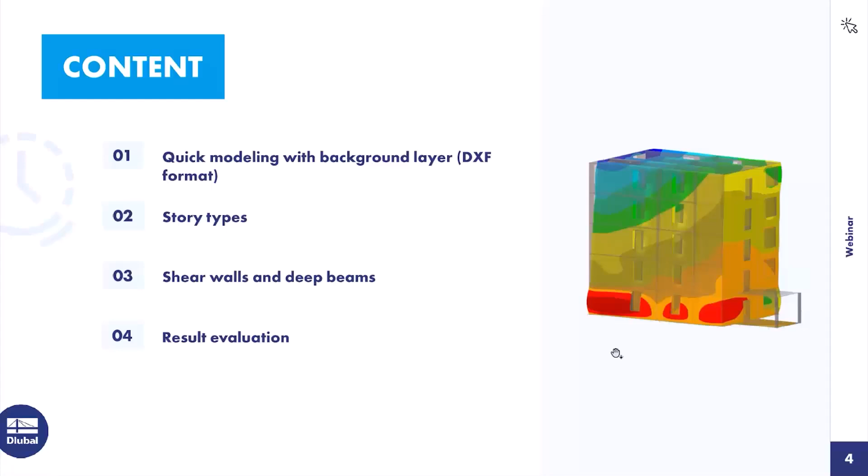Okay, then to our first chapter, quick modeling, here with a background layer for an easier way. I will import a DXF file, and it's a modeling option from bird's view, floor plan, top view - however you want to call it. At this time, we have added this button in the building model add-on.

It's an exclusive button, and you can see the objects you can generate or model in this bird's eye view. So then let's switch to RFEM 6, and I can show you what I mean.

I'll start a new model, let's call it building model. First we must activate the add-ons, of course the building model, and today also the concrete design, so I can show you the configurations and special options which are connected with the building model add-on when the concrete add-on is activated.

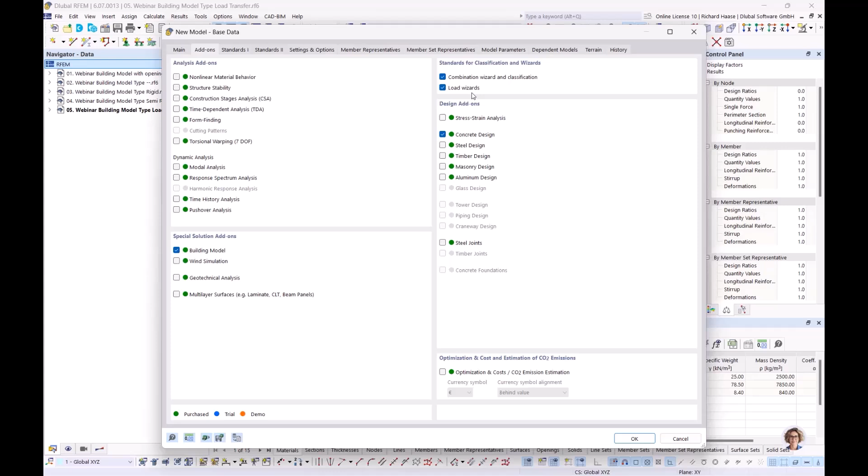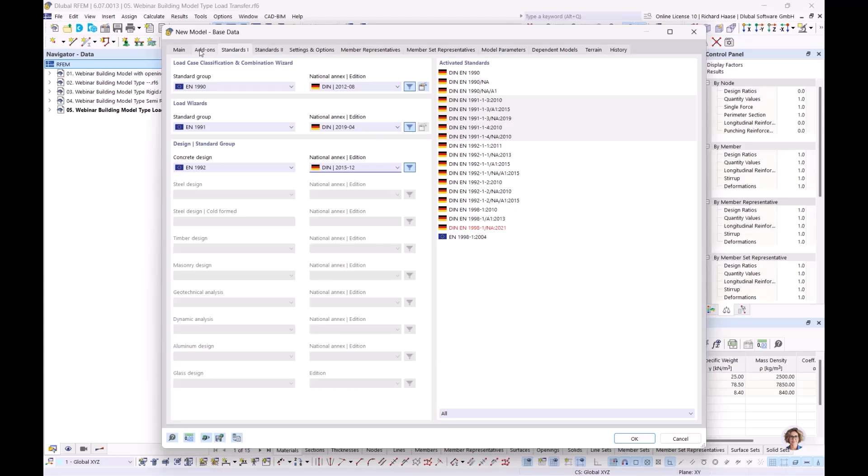And for the quick modeling, I also want to show you our load wizards. For this, today we want to choose the German annex. So when you activate the building model...

Automatically here under settings and options, our surface cells are activated, and this is a nice feature for surfaces which are, let's say, separated by lines or different parts, and you can control and modify the surface cells. But yeah, I will show you.

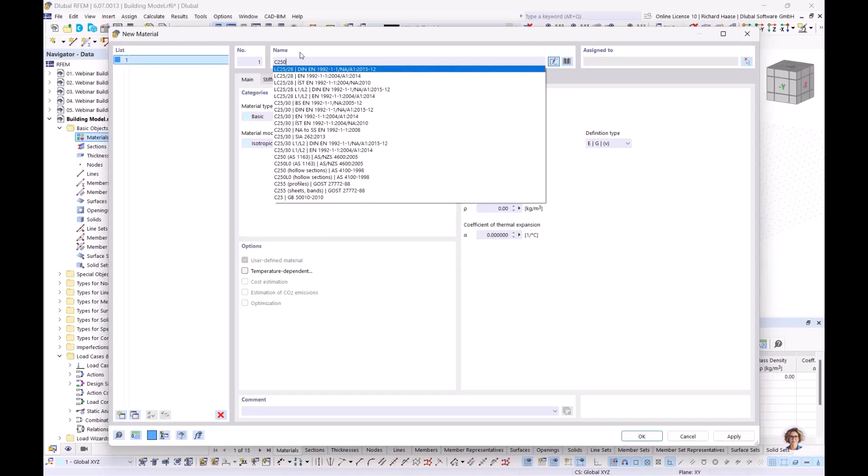So okay, then let's start with the new model. Let's delete all objects so we really have a new model. Let's start with the materials. There I need concrete at first - let's take C25/30. Then we need reinforced steel.

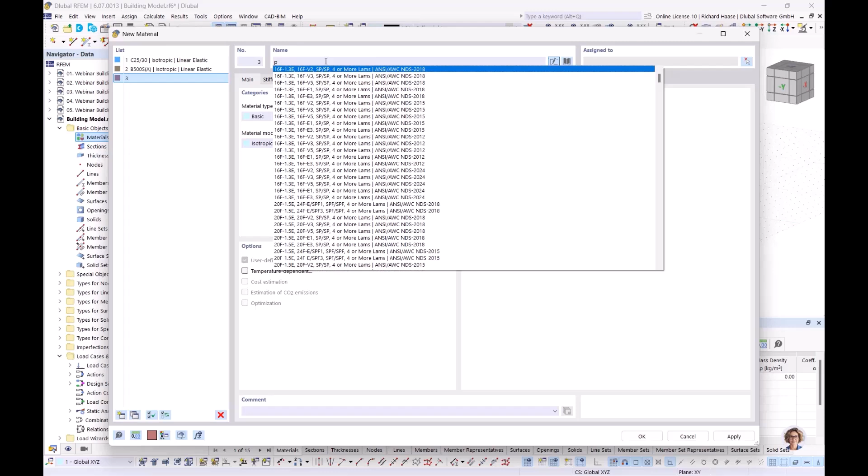Let's take the B500. Okay, and also we need masonry - let's take this one. Okay, then we have defined our materials.

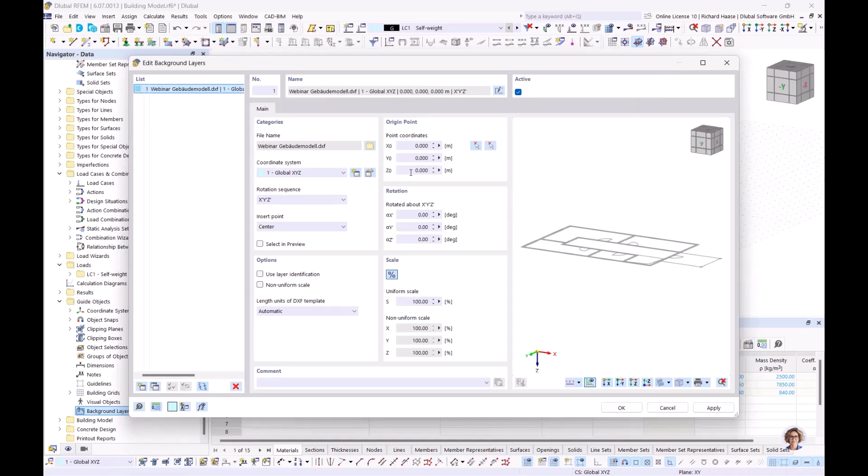Yeah, and okay, then I will upload my DXF file, my background layer, so I can show you what this building is about or how it looks like. Okay, and now we see it's nothing big. It's a simple model, but yeah, for this case it's good.

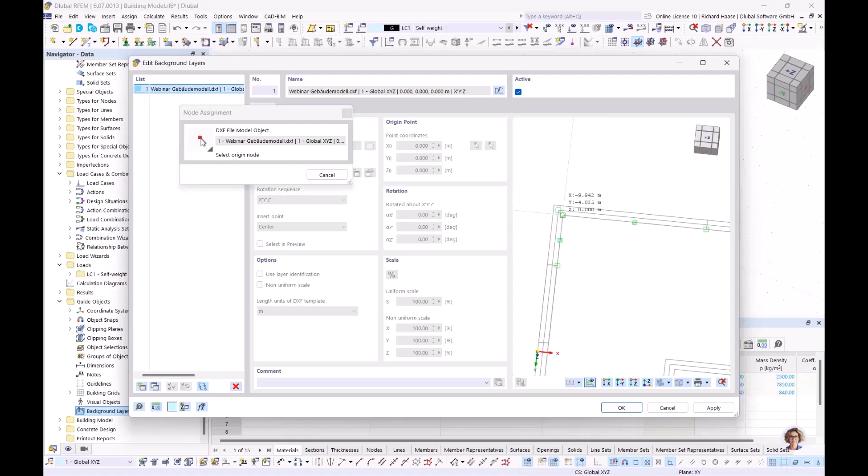Then let's change to meters. And when you add some background layers, you have here two selecting points. The first you can choose - I will set it here to the 0 point - and the second you can choose in your DXF file. I added here some statical system lines. I will choose this line for this.

Now we have our DXF background layer. The walls on the outside should be in masonry, and the inner side walls I will create in concrete. Also this slab cantilever, so not really cantilever, but it's only on the ground floor. And here we have some columns.

Let's go back to our definitions at the beginning. Materials we have defined. Now let's define our section. For the column, it's concrete.

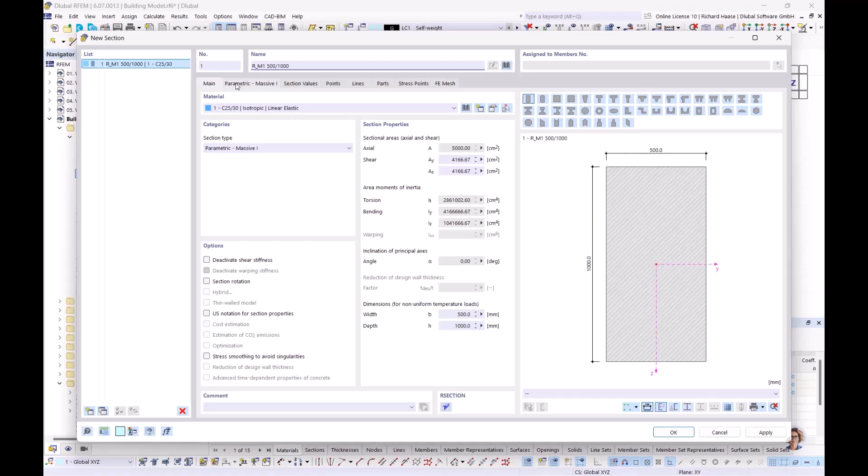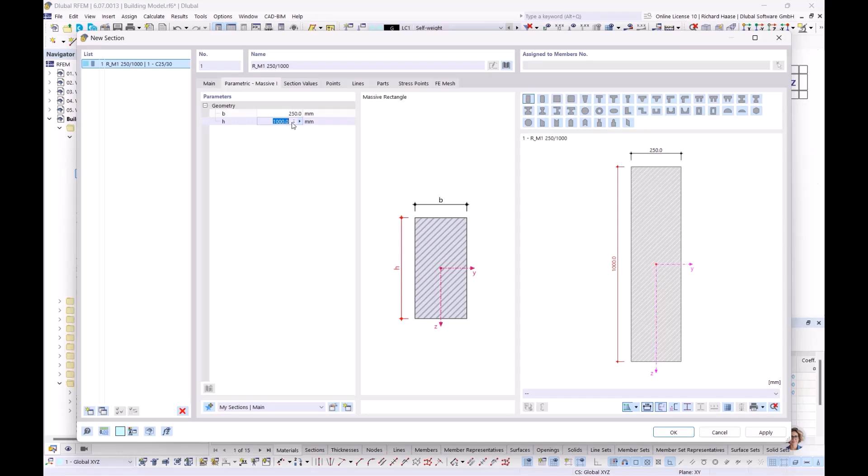Now I will show you a nice feature. When you work with your DXF file, you have the option to measure the properties of the section. So let's take this: 25 centimeters, and also on the other side, also 25. Okay, then let's say okay.

Now we need some thicknesses. Let's start with the masonry walls. And also we have here the same type. Okay, then let's choose this 24.

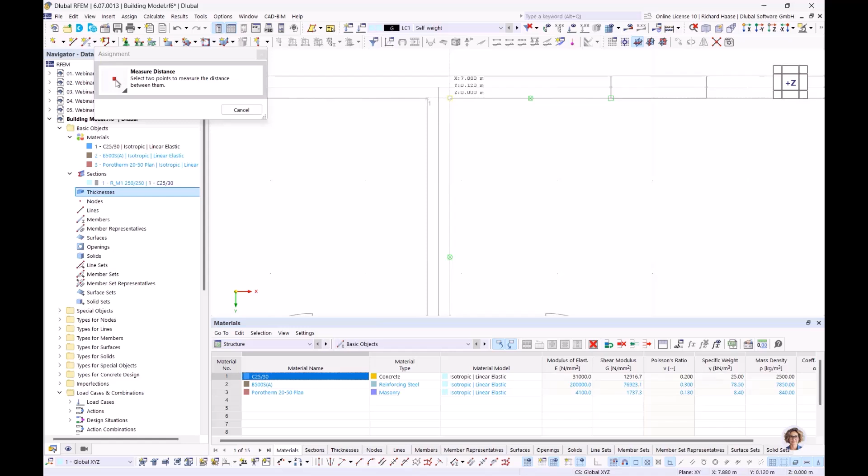For the walls on the inner side with the concrete material, we can do here best way 24. And for the foundation plate, let's say we want to have a thickness of 35 centimeters. Okay, then let's say okay.

So we have defined the materials, the section, the thickness, and now let's go here. Then we must spring to the building model add-on, and we will define now our building stories.

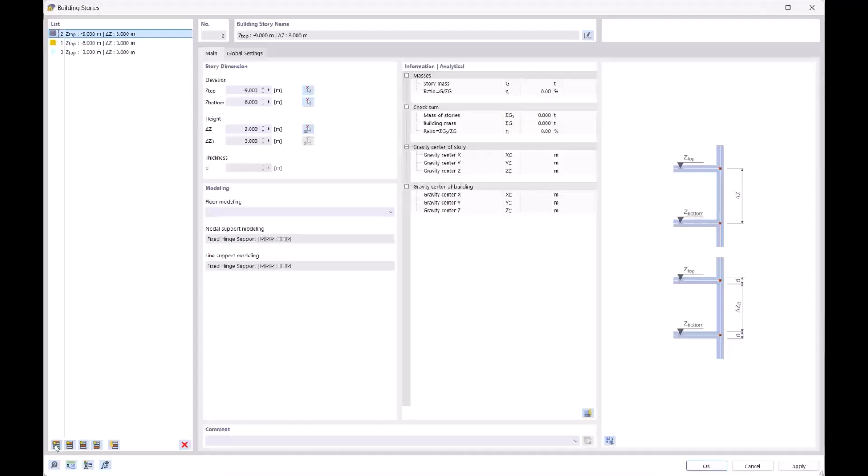I want a new one with a height of 3 meters. And now again 4. You also can model first, but because of this fast modeling, you need to define the stories at first. You can switch here, and now you see story heights here. Here are the floor modeling options, but I will show you at a later point.

So now we have our materials, our sections and thicknesses, and we've defined our stories. Now we can start to define with the fast modeling. So let's start with the walls. Let's take here our masonry material, and now we can...

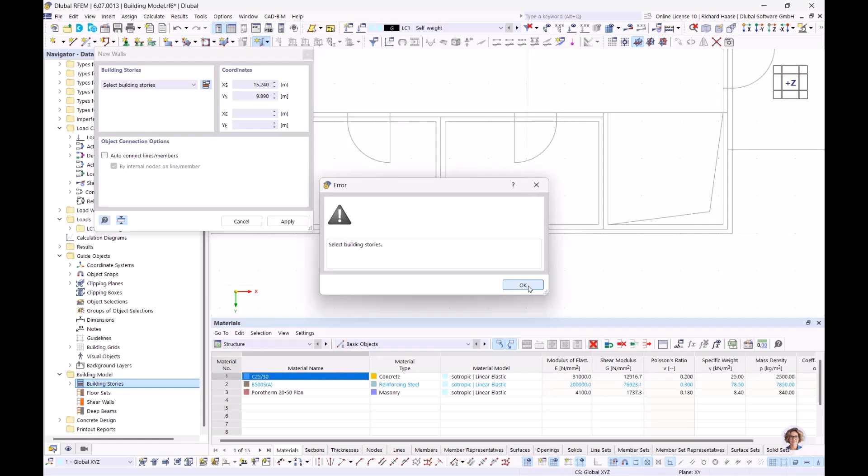Oh right, for this you need to define the stories. So you can choose if you want these walls in this example only on one floor or on different floors, or in our case, we want to have these walls in all stories. Then apply, and let's start.

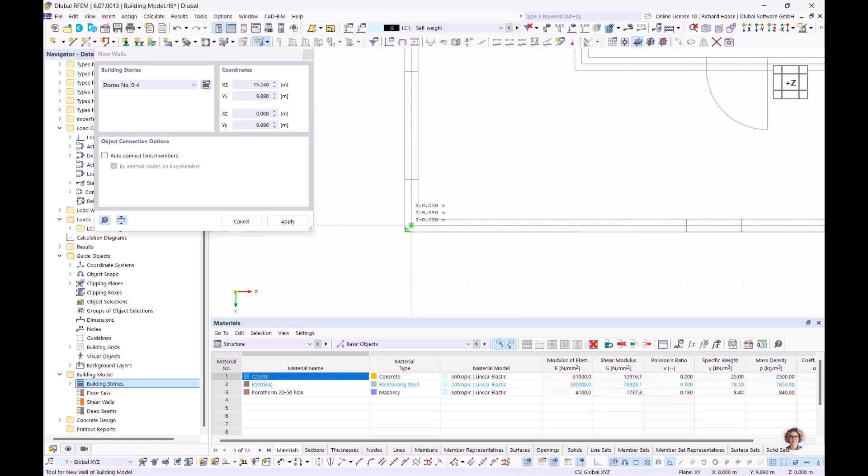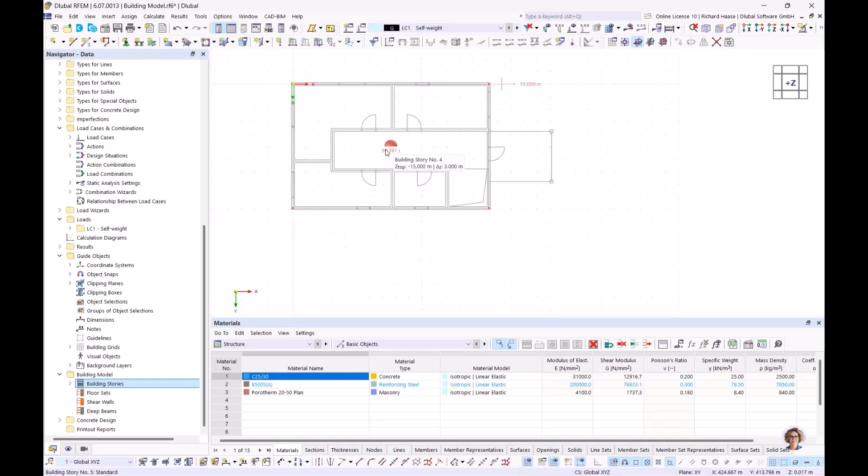So now you see this mass, and it's also because of the building model add-on. The add-on now creates a center of mass, and all these masonry walls are added with their mass, for each story. So you see all outside walls are created, but let's continue with the inside walls.

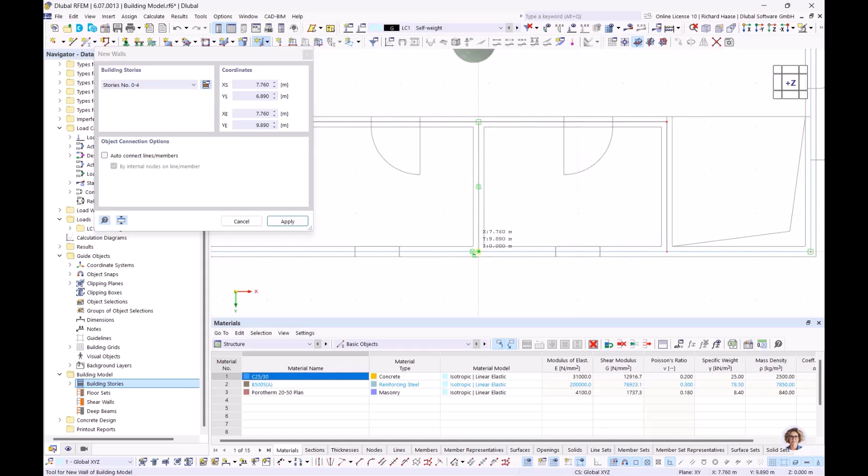24, yeah. Okay, here and here. Here and here. And the last one is here. Okay, let's check if I got all walls. Yeah, it looks good.

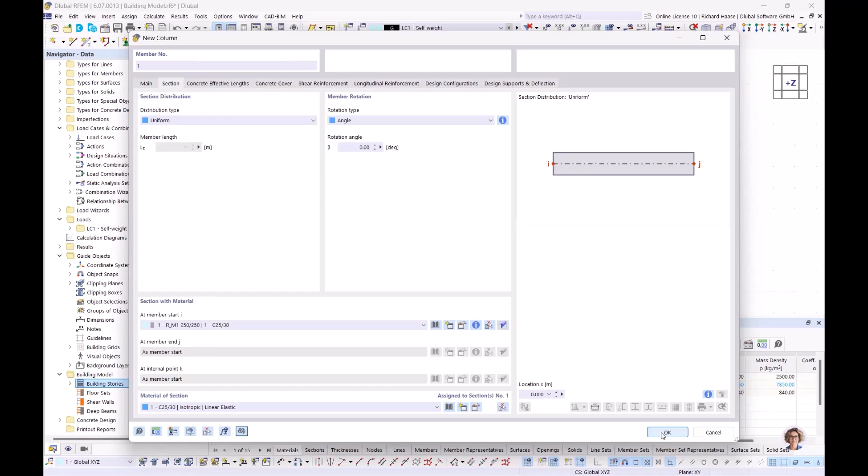Okay, then we want to define our columns with our section we have defined before. And now we don't want it in all stories, only in the ground floor. Say apply, and click here and click there.

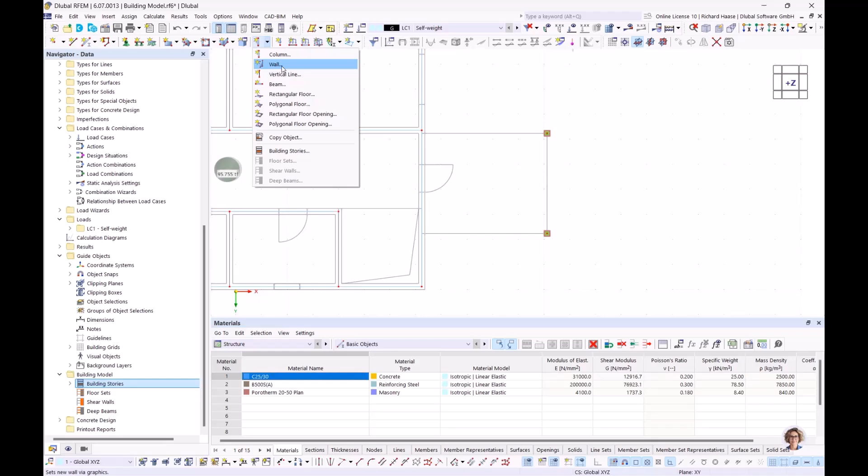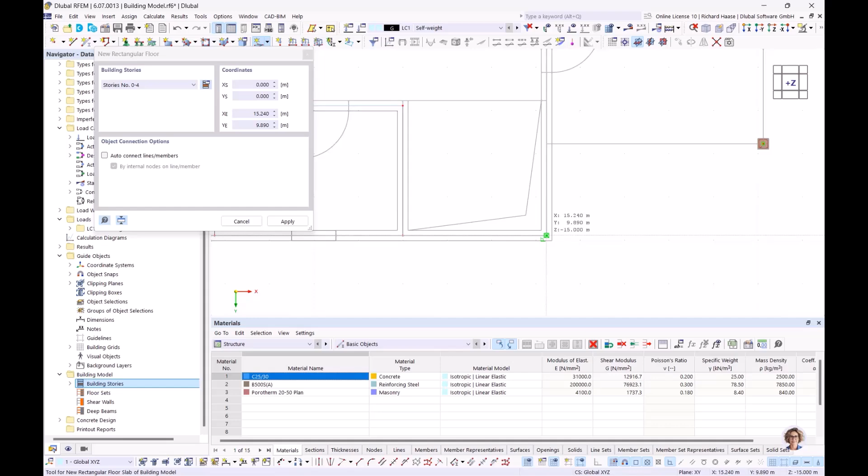Okay, then same procedure for the floors. So 24, okay, and for all stories, apply. Oh, a moment, that's wrong. Okay, again, floor, for all, and apply. Okay, now we have also floors.

Now we need this, I say, cantilever floor. Okay, also 25, and only on the ground floor. Let's start at this point.

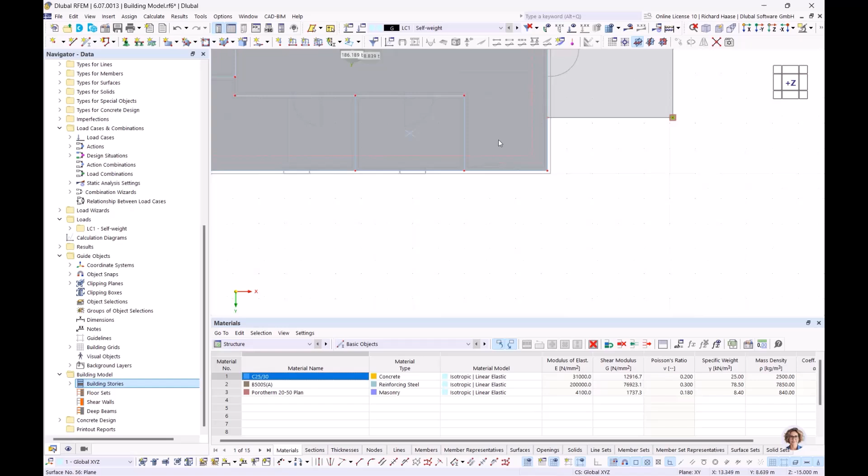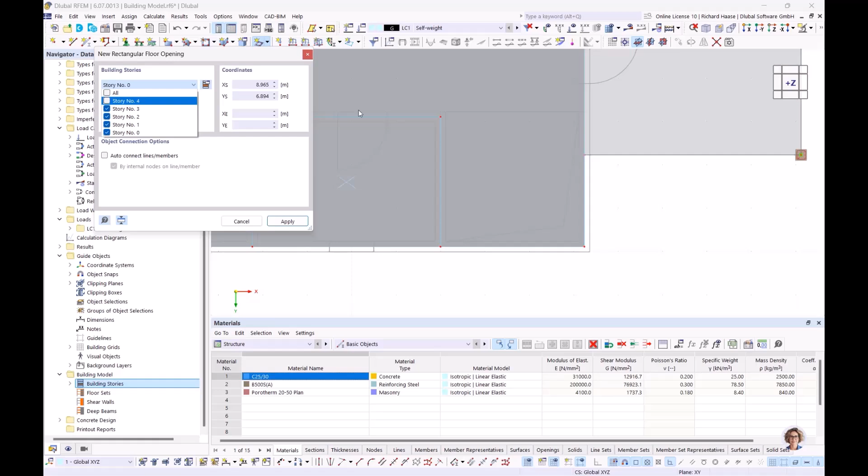And here we have an opening in the floors for stairs. Let's define this floor opening. Here, let's see, not in the last floor. And okay.

So now we have our openings, and you see in a short time we generate a building. The only thing you must generate manually are the openings, the windows and the doors, for example, or other openings in the building.

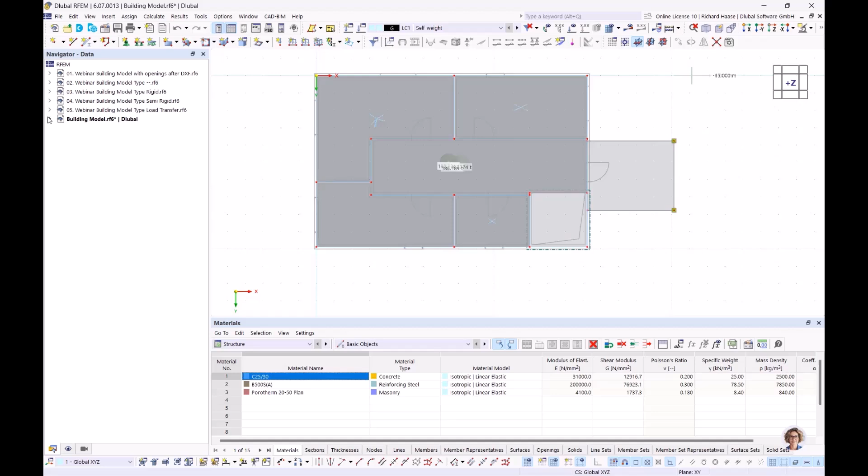And to not waste time, I have modeled this already. Maybe I can switch back to the full model, and there you see the openings. I added also some load transfer surfaces, because imagine when you define wind loads only on the masonry surfaces, these areas for a closed model are missing at the end. So you can define these load transfer surfaces, and these surfaces only transfer the loads to the sides, and don't have a stiffness effect or such thing—only for load transfer.

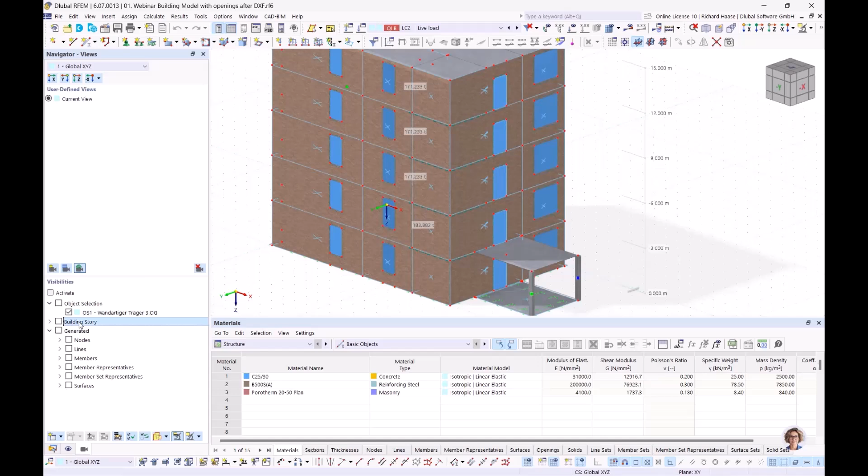Then another nice feature which the building model makes automatically is in the navigator views. There is a point called building story, and when you activate it, you see every story you defined—there's automatically created a view, so you can quickly switch between the stories for loads and such things. I find it a very nice feature.

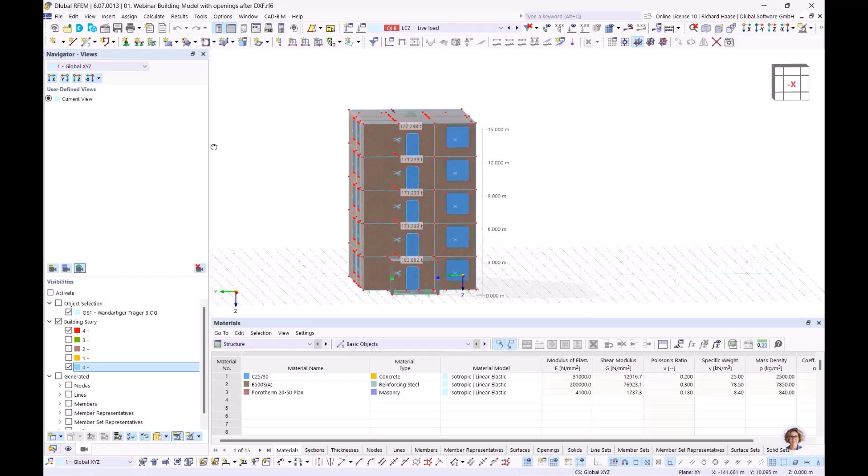Okay, then what I want to show you also—for example here you see it's one big wall, and you see these blue crosses. Oh wait, maybe we change the view. Oh, it's not functioning how I wanted.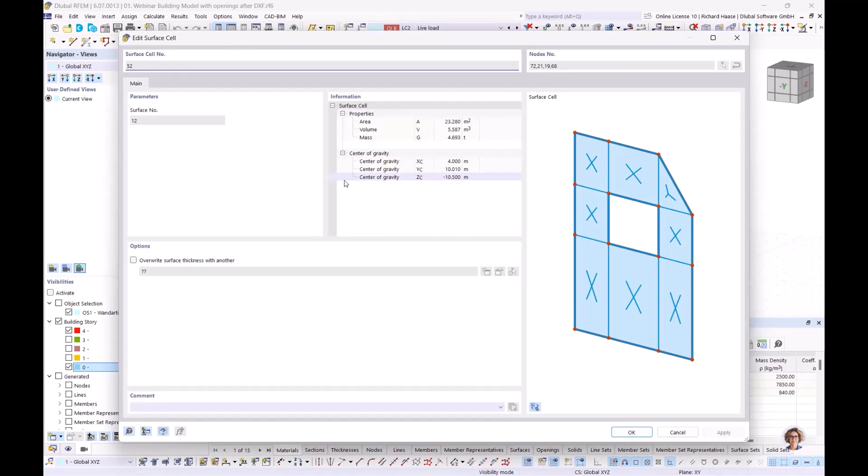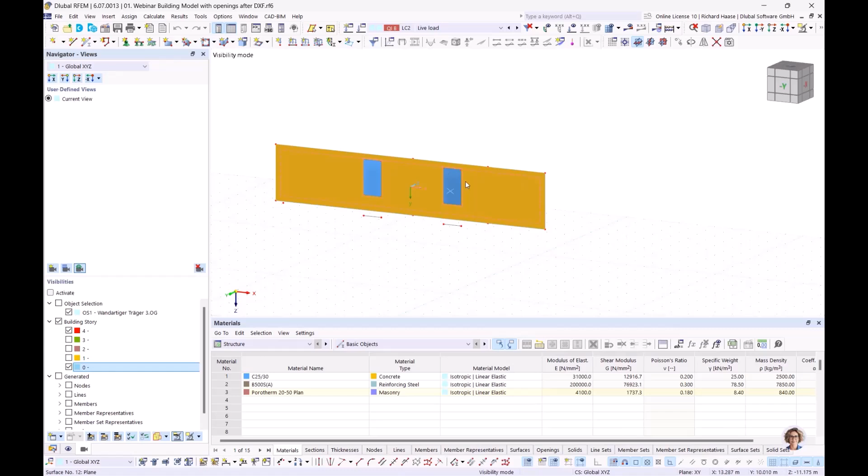You have only one big surface, and with these surface cells you have the option, when you click on the surface cell, to give these cells other thicknesses. With the different thicknesses you can also design the surface as one surface, so it's nearly the same effect as when you use surface sets, but it's a more easy and faster way to define this.

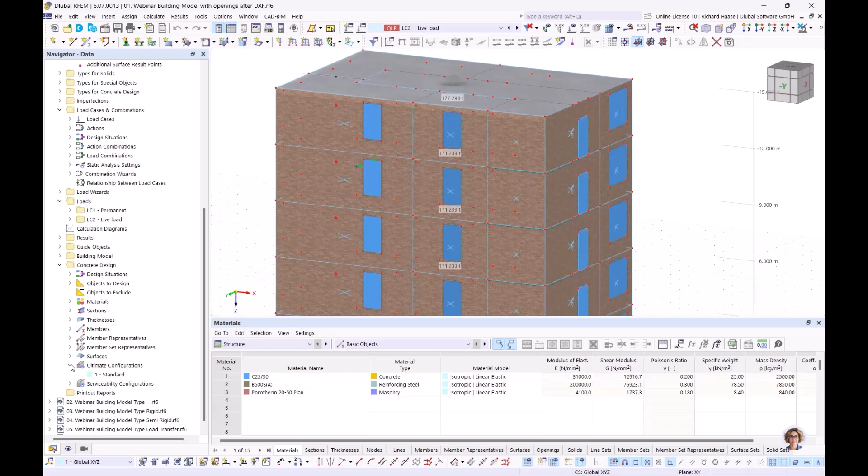Now I want to show you the concrete design. When you activate the building model add-on and also the concrete design, you find in the configurations some additional points which are only possible with these model add-ons. Here are some options for deep beams and for shear walls, so that's now possible.

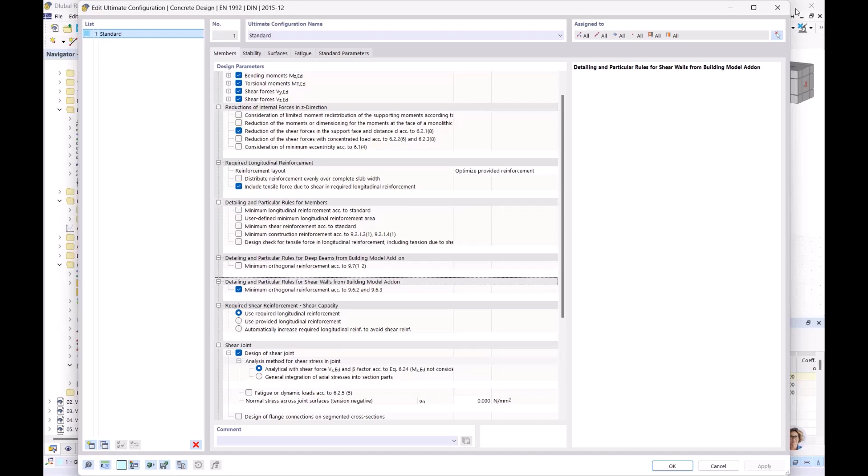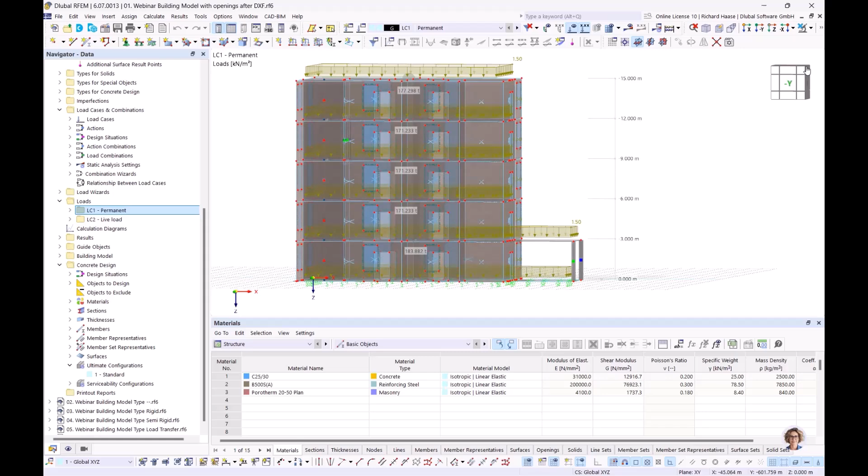Before that, maybe we switch to the loads. Here we have some permanent loads, nothing special, and here some live loads. Now I want to show you the easy way to design wind loads with our load wizard, which we find here.

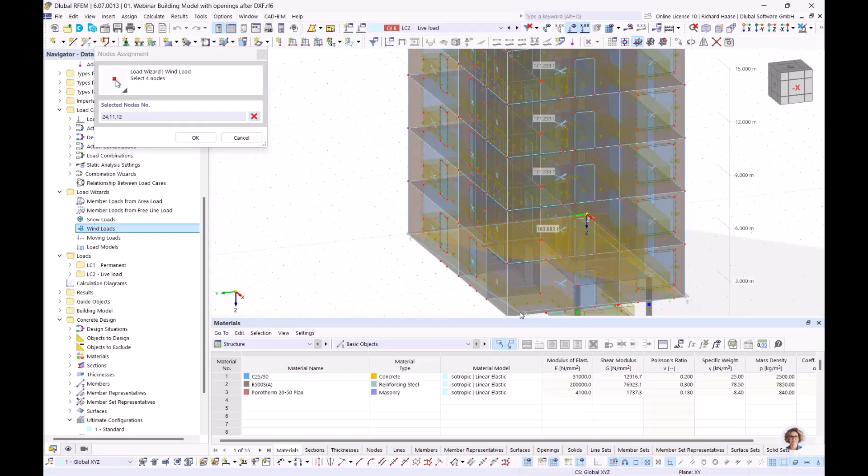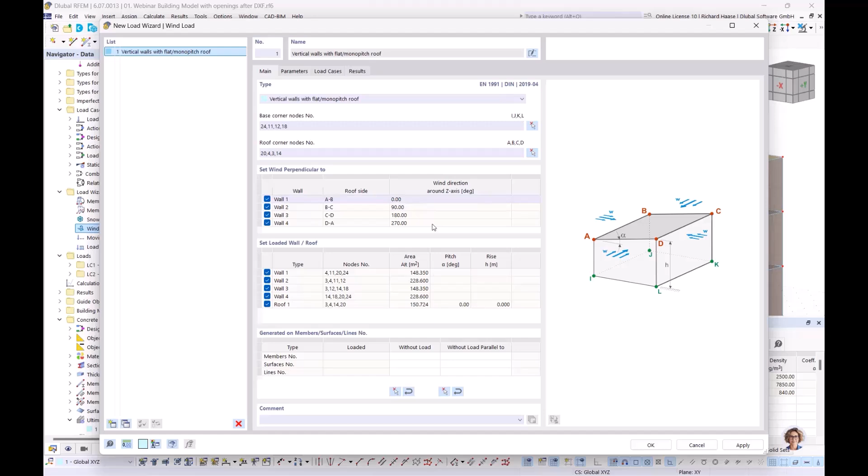For example, here are our wind loads, and so we have a flat roof. Now we want to find the base corners, and also the roof corners. Now you see all walls are automatically detected, RFEM automatically sees the needed walls and roofs.

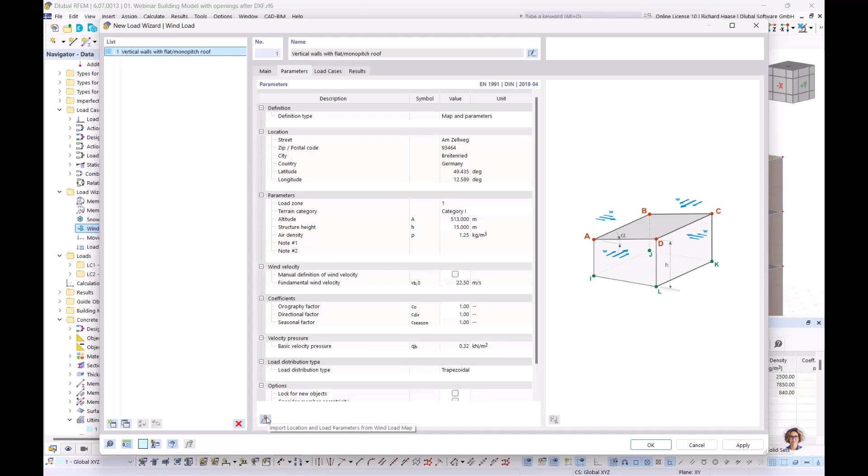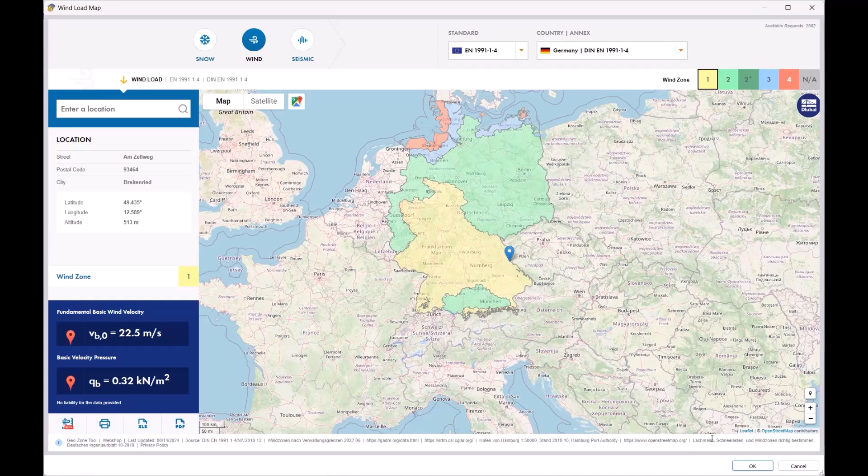Another nice feature is the definition type with map and parameters. That's the way I switch to the German annex, because you need this national annex to define or select on the wind load map. Let's choose the headquarter of Dlubal, here in Tiefenbach, Am Zellweg 2. Why am I not connected? One moment. Okay, now we have it. Let's say okay, and you see the program transfers information from these wind load maps, the terrain category, load zones, and all information for the wind loads.

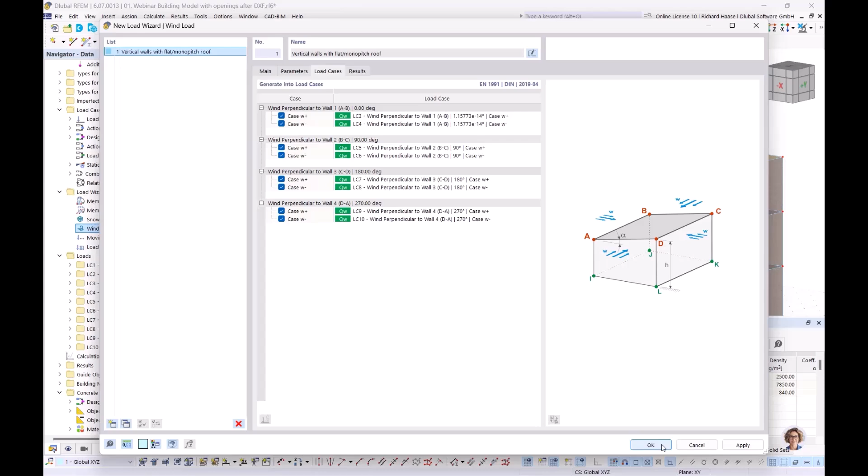Also, you can generate load cases per direction automatically. Let's do this with this button, and you see all directions. Now we have our wind loads fast and correctly generated for all directions, and I find it's a very nice feature.

The same for snow loads, with a connection to the Google Maps view. With these load maps, it's the same procedure. Then for buildings, we have the snow and wind loads generated very fast. That's the points about the quick modeling.

Then I will switch back to my PowerPoint presentation, to the second point, the story types. After definition of the stories, you have these 4 types. What are these 4 types exactly? I will tell you now. Independent of which type you choose, you get specific results for mass and story by story results, which I will show you at the end of my webinar. So let's start with this first type.

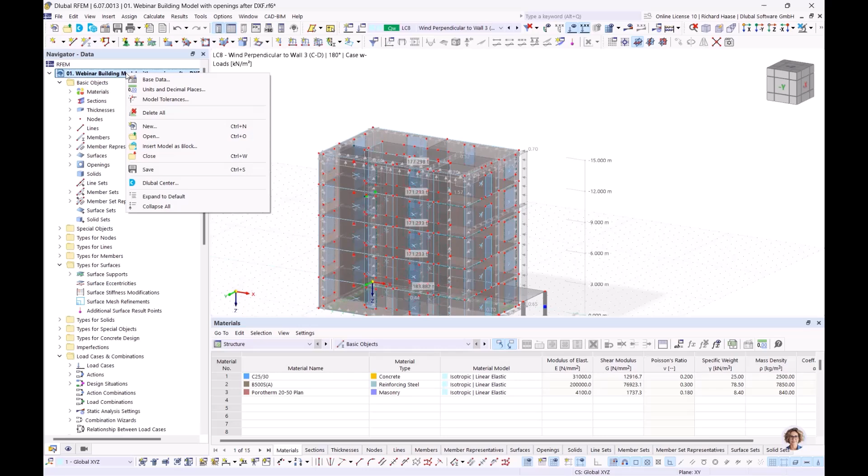Okay, then let's switch back to RFEM 6. Maybe for a better overview, I will close some windows. Okay, I've saved another way. Now we have our 4 types. Let's start with our type load transfer, so I can show you what is happening here.

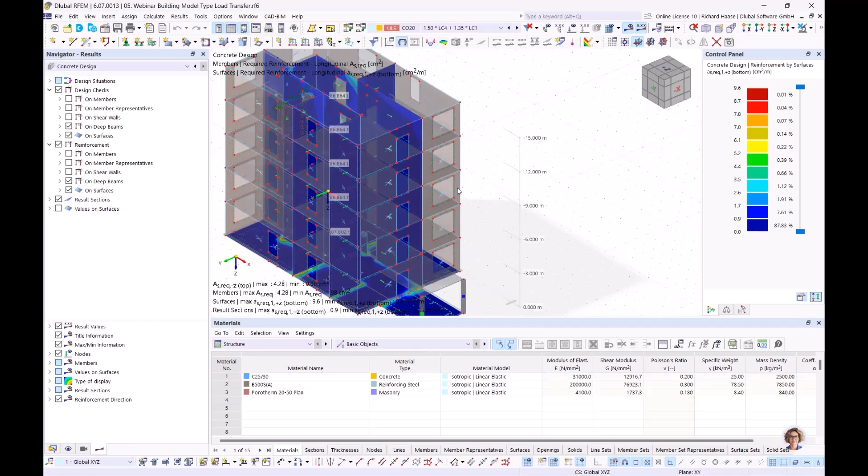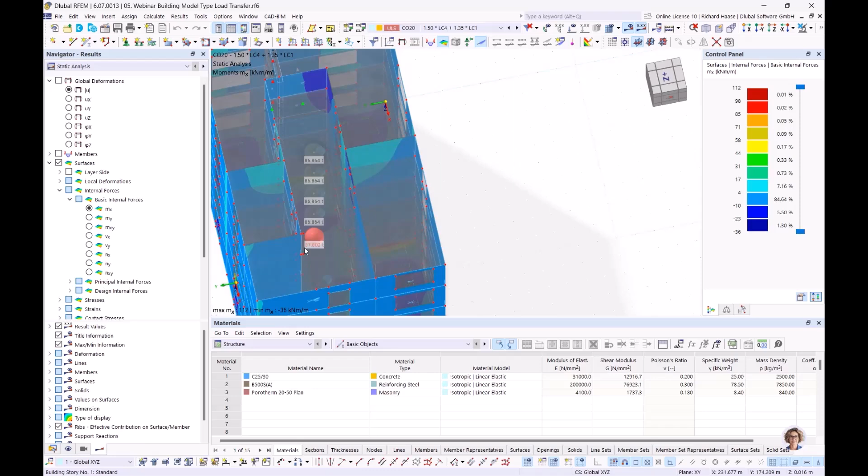So we want a static analysis, and for example bending moments. When you see here, we have no moments in the floors, only forces, and no forces in the slabs, only forces in the walls. So here no wall, no slab is activated. So it's really a simple load transfer. Then we can close this too.

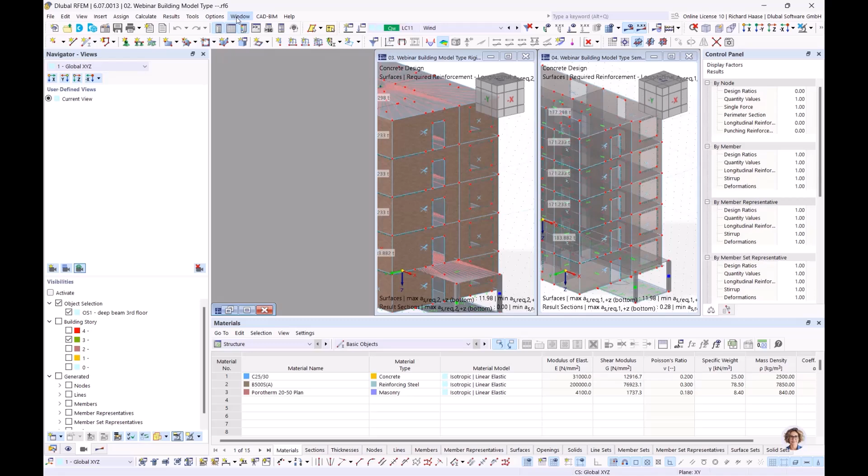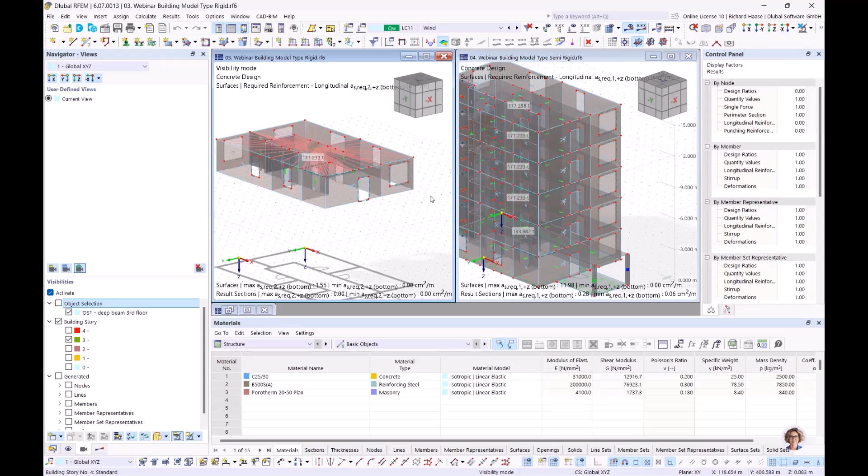And now let's compare this way. Maybe we can minimize this, and again here. So now we have our rigid type, and I choose the 3rd floor. Okay, and we want to have the same overview for our semi-rigid, so I can show you the differences directly.

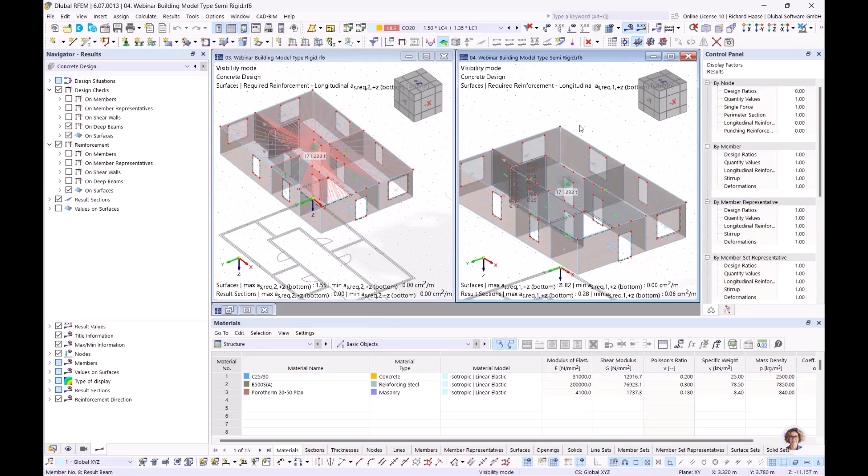Why is it still activated? Okay, then let's choose a load case with wind and self-weight for both. So when we now switch to the static analysis, we have an additional point, analysis of building stories, and this analysis is only possible with the type rigid diaphragm or semi-rigid diaphragm. So then let's look at the floors first. Moment is okay. Let's switch to isobands.

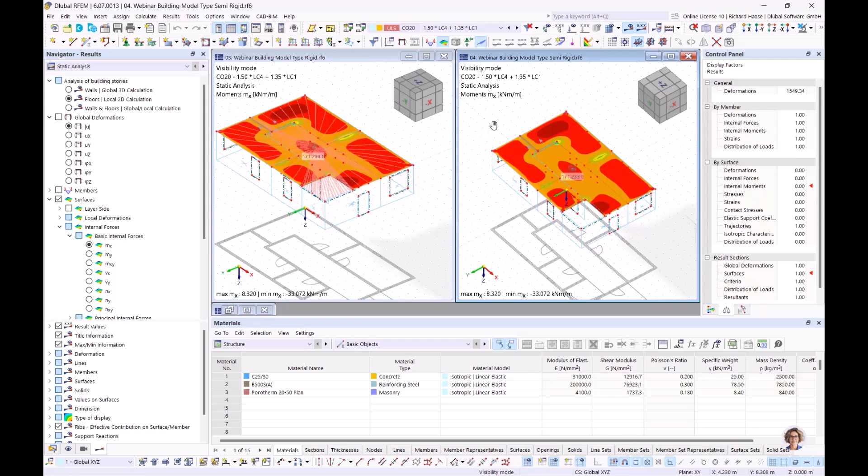And here we need also MX. You see here between type rigid and semi-rigid there are no differences. It's exactly the same calculation. Also when we switch to deformations, for example, it's really exactly the same.

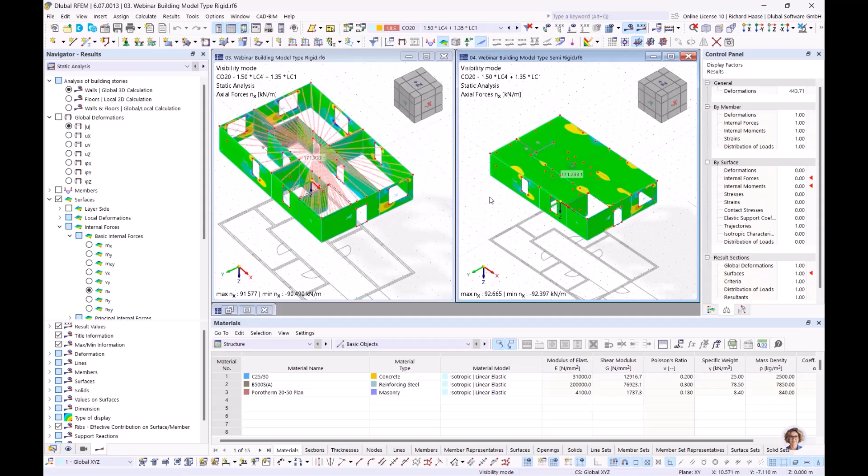And the difference is between this 3D calculation. So when we look at our rigid type, maybe again NX, and also NX. You can see it here: in the rigid type, the slab has infinite stiffness and doesn't have an effect on the calculation for the walls, so the walls stand alone more and more. Here in the semi-rigid type, the slab also has an effect on the 3D calculation of the walls.

So also for the deformations, you can see it here. We have only 1.8 because of the stiff slab, and here with this softer slab through the real rigidity of the slab, we have a bigger deformation. I call it the traditional structural analysis, calculation with positions in a static sense, and you can see it.

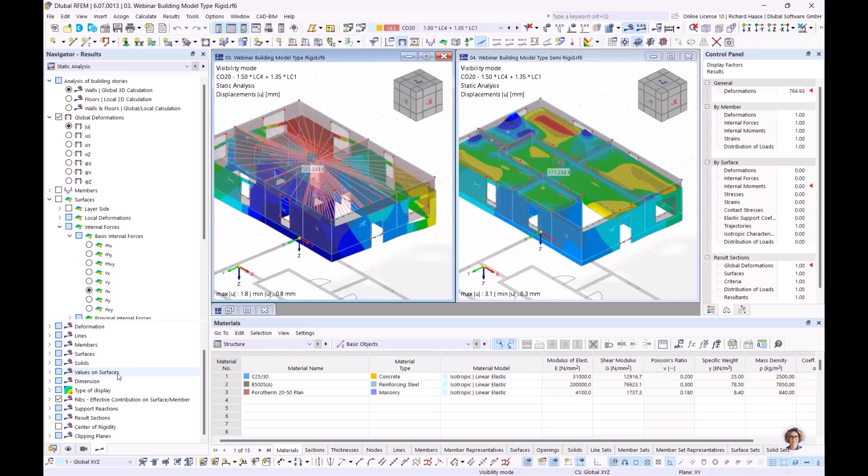Let's activate the values on surface. Let's again switch to MX. Let's make it this way, we see it better. So the walls here, let's see, these 0.238, and the floor 1.005 — these walls and floors are only a result of walls and floors acting independently. So when we see it here, we have our 1.005 and here our 0.238. So you see it's independent, it's not affecting each other.

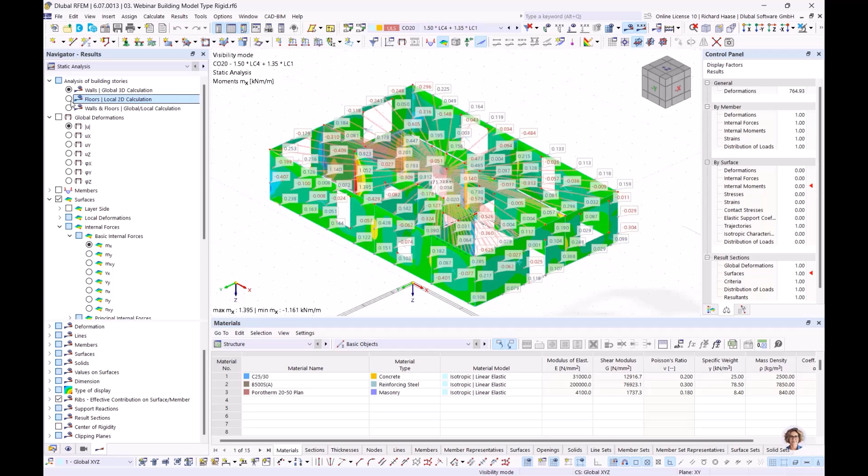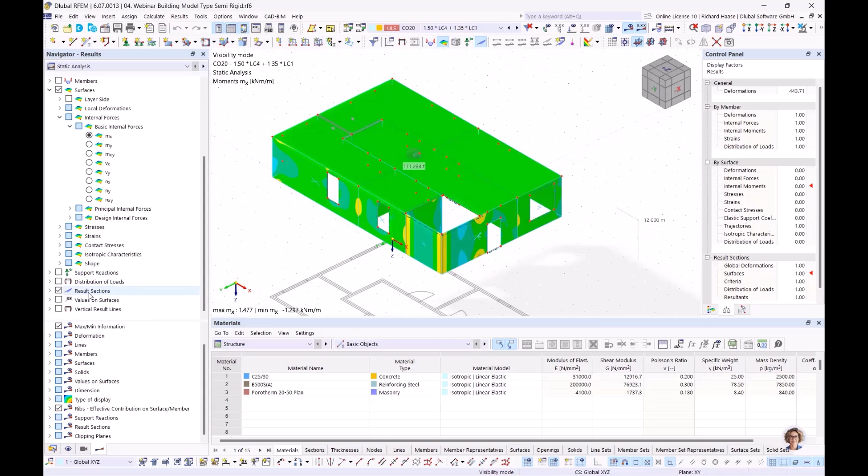Here you see we have different, or wait, it's in the global deformations we see a difference. So we have here deformation 3.1 and here 0.3, and here it's a mix of both. So the results are working together, let's say, in this way.

And again here to rigid, with the deformation — I think, sorry, it's a better way. So let's see, here we have for the walls 1.8 and for the floors 0.3, and this shows only the maximum of one of these, and it's exactly the 1.8.

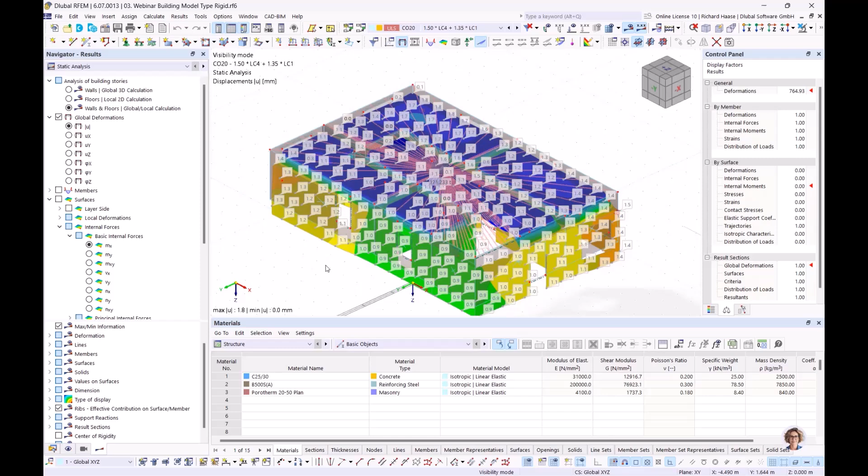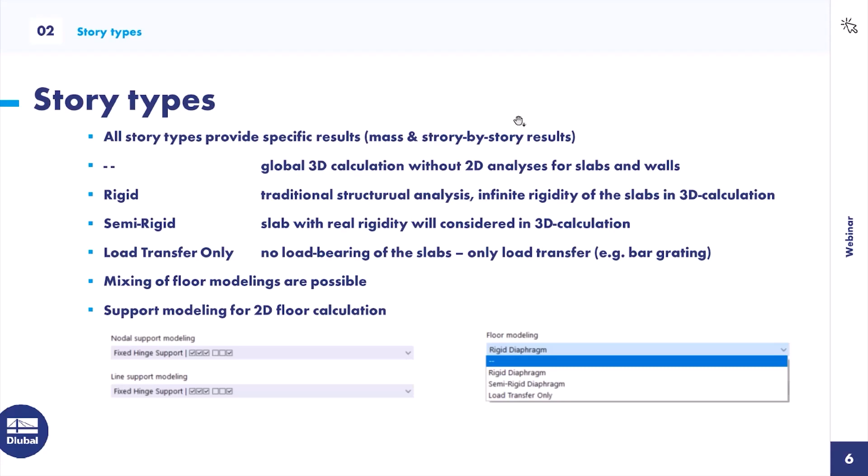That's it with this point. Then I will switch back to my PowerPoint presentation, to the shear walls and the deep beams.

Both objects you must define in a manual way and choose the surface or surface cells, or also you can choose members to define these objects, these shear walls and deep beams. Both objects automatically generate a result beam, which is an integration of surface forces integrated to member forces.

You also have the option to generate result sections, and result sections create an intersection line, and on this line you can see results on this area, let's say.

Important for deep beams to consider nonlinear calculation, or the forces which come through this surface type.

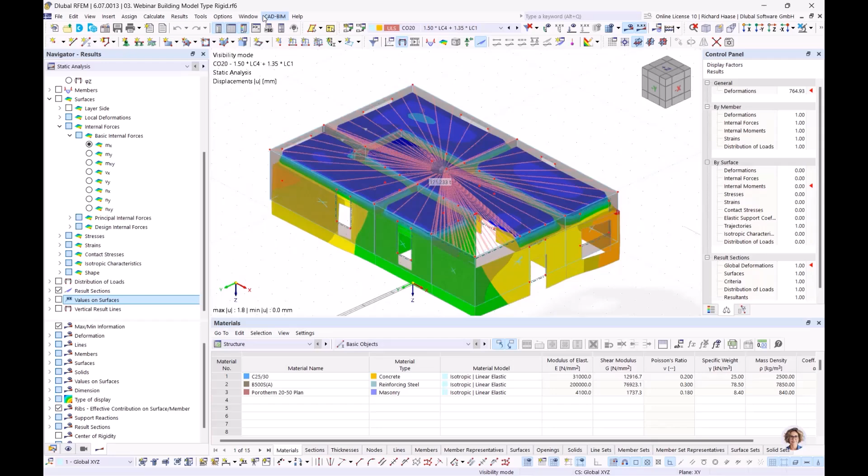Okay, then let's switch back to our RFEM model. I will work now with this type and want to show you how you can define shear walls and deep beams. I have modeled this before, but so you can create a new shear wall, and you must assign objects.

design add-ons, in this case concrete design, then you see here the typical tabs you can find also in every other concrete design object. You can define shear reinforcement, longitudinal reinforcement, and all the other definitions.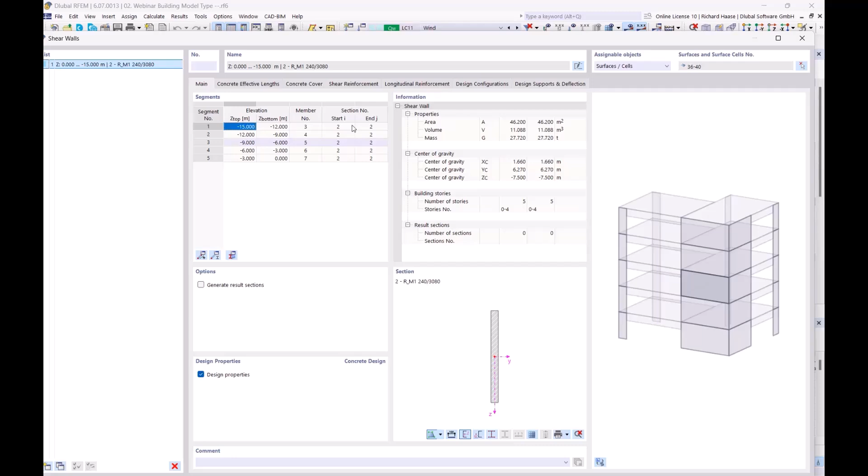Also, regarding the definition of the reinforcement, I must say when it is a simple wall, in this form, I'm not 100% sure, but for example with some other simple geometries, it will also be possible to define your reinforcement.

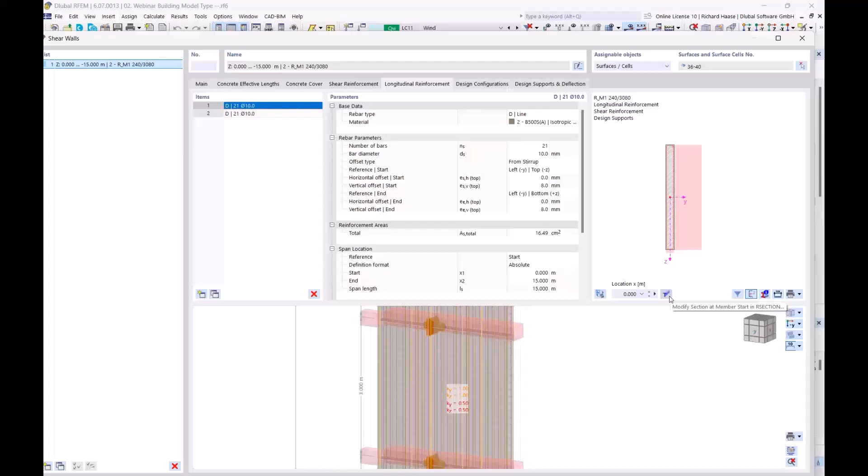But when you have a completely individual form, it is not possible to create such reinforcement in RFEM 6, but we have an option here with this button. You can open our RSECTION tool and RFEM exports your individual section there. Then you can define the reinforcement you want and send it back directly to RFEM 6, and it is actualized here, and then you can calculate it with your own defined reinforcement.

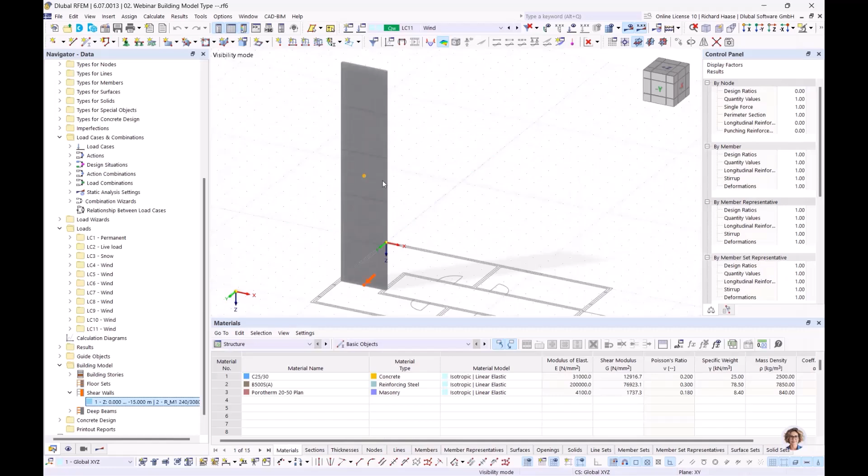That's a point I want to say. Okay, then maybe let's see, we are in the concrete design, and you also see we have here additional object types, shear walls, deep beams.

And also in our concrete design we have here design ratios and reinforcement for shear walls and deep beams. So you can see here, like for other objects, calculations and the results for analyzing.

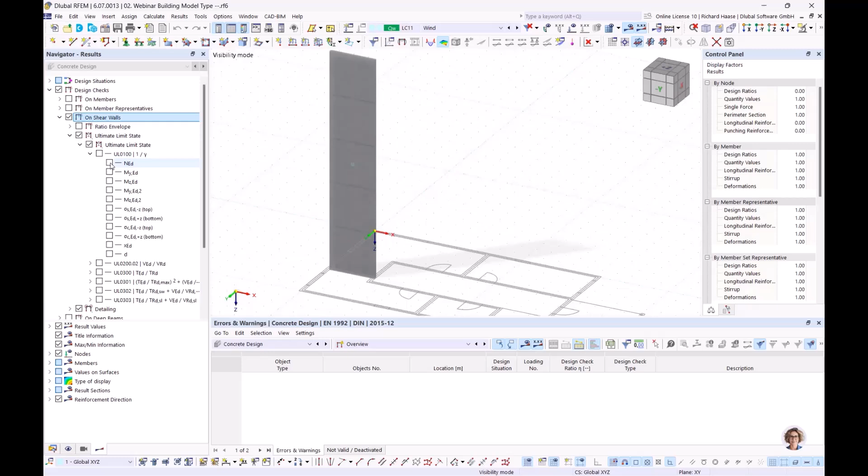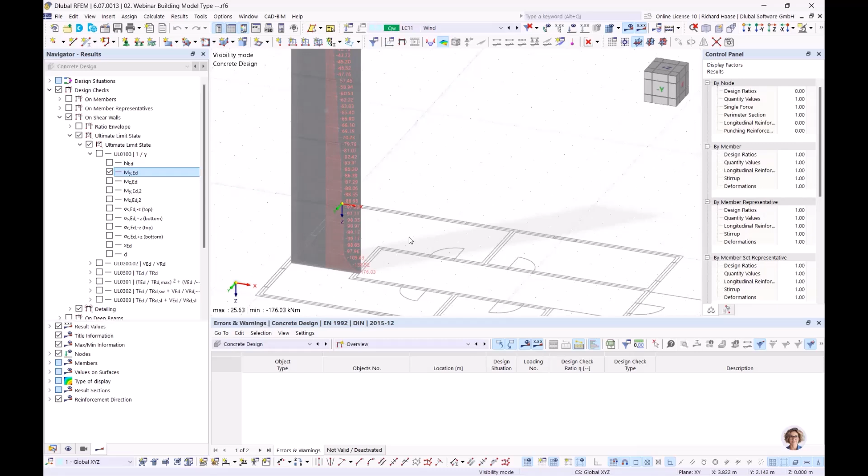Okay, so a big point for these shear walls, you also have it in the table, but I will show you in my next chapter. Here, for example, you see the axial forces which you get per story, and the moments, and it's very good for controlling and for seeing which forces are here.

Okay, then the same procedure for the deep beams. The deep beams you also can define like the shear walls, it's the same. Here I generate result sections because, as I told you before in the PDF presentation, the height to length ratio, you should look on this.

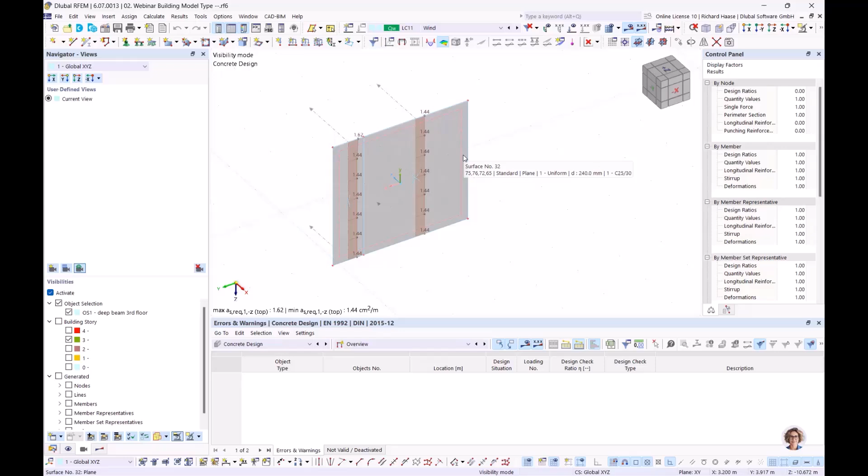I want to show my deep beam. I have created my own object selection for this. I have very little load, so this is only construction reinforcement. Normally you have more on the bottom side and so on, but I want to only show you the workflow, how you must work with this, or with these results.

Okay, so when we look at the reinforcement on our deep beams, no, sorry, we need a surface, of course, because the deep beam here is our result beam, but because of the height to length ratio, we must do it over the surface with result sections.

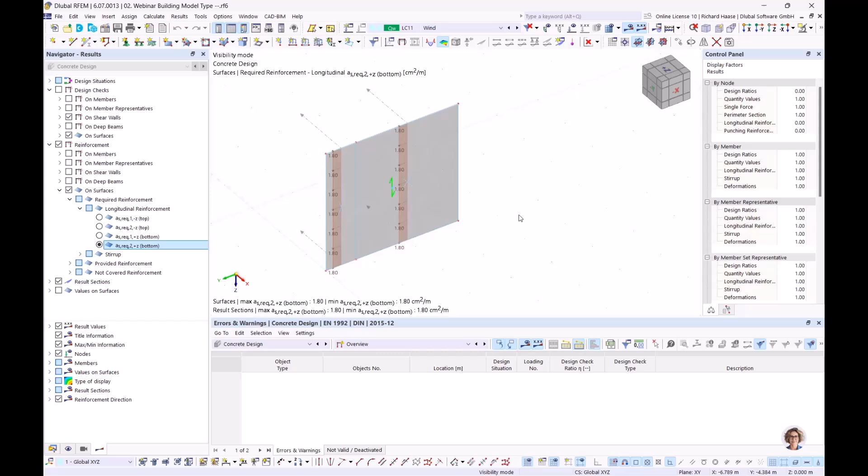You see in this direction it shows the required reinforcement on the bottom side, where you have this steel tension, what you need. So let's remember it's the one direction, and the second direction is for the shear reinforcement. So when we look at our result diagrams, let's remove all and go to here 1 1.

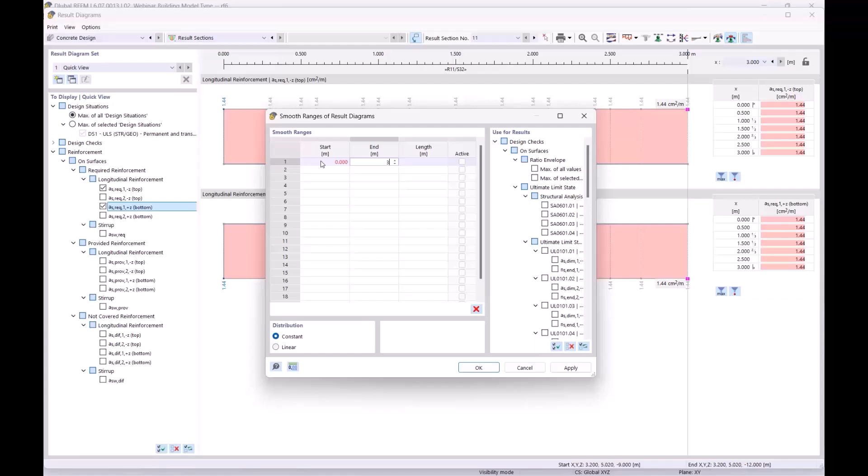Then we have these results here. Now we must define a smooth range over the whole length, so we have 3 meter constant, and now we have our result. So we need this 4.31 plus 4.31, so we have a sum of 8.62, which we must put into the bottom side of the deep beam.

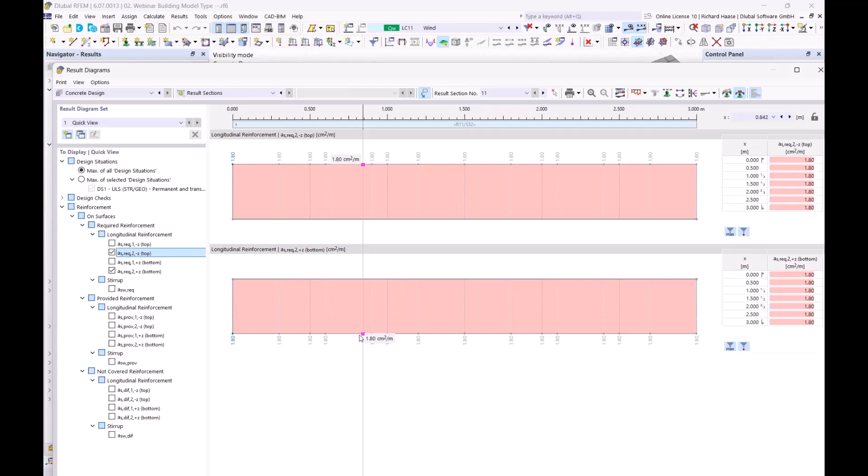And the shear reinforcement: we look at both directions, top and bottom, and choose the maximum value. So here it's nearly the same because we don't have big loads, but we must choose this 1.8 for the shear reinforcement, and that's the workflow we have at the moment.

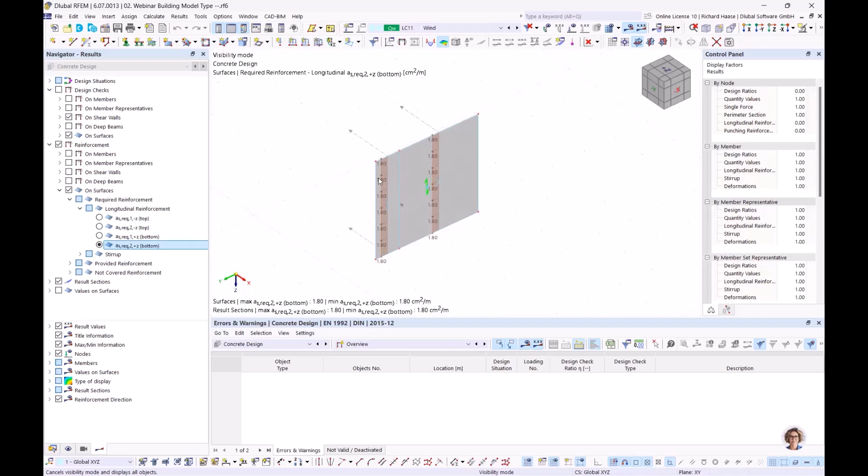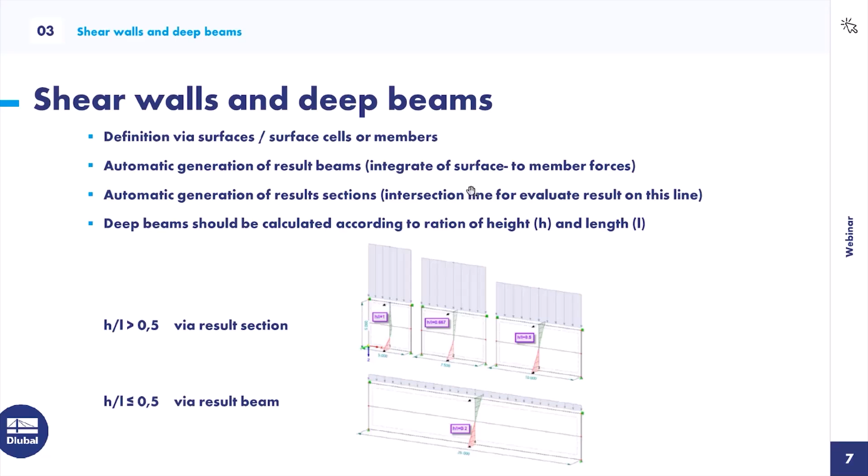Yeah, okay, that was about shear walls and deep beams. Let's cancel this visibility, and let's switch back to the PowerPoint presentation, to the last chapter, the result evaluation.

When you click the static analysis here, you have these point results by stories, and you have these 5 tabs: the center of mass and rigidity, story actions, interstory drifts, then forces in deep beams and shear walls.

Maybe it's easier when I show you on the program. So let's switch again to RFEM 6, and let's go to the static analysis and results by stories. Let's start with the first tab, the center of mass and rigidity.

The mass shows the mass per story, so you see it's nearly the same here. Only the ground floor has more mass because of our foundation plate. Out of these masses, RFEM creates and shows you the mass center for every story, and we also have the cumulative mass. This mass, maybe you see here in the top floor, it's exactly the same.

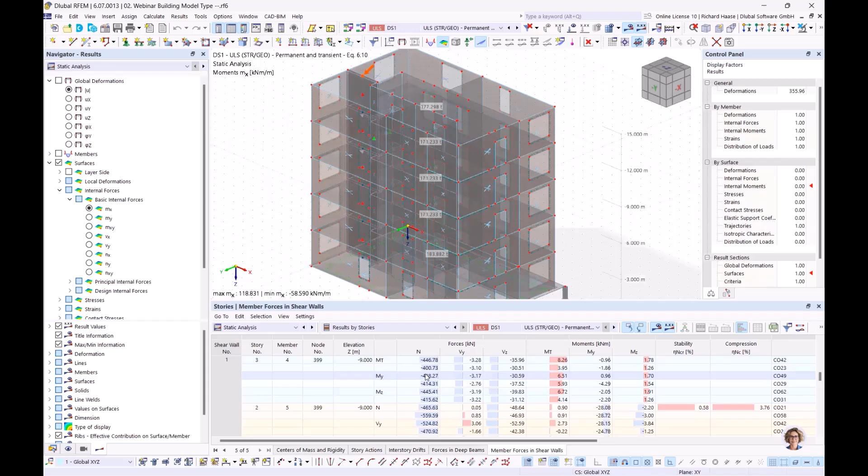And also here about the deep beams and shear walls, you can see the results of the result beams which are created for the deep beams and shear walls, and you can see all forces which are there in which story. For example, here the axial forces, you see how they grow every story, and what I showed you before in the graphic menu.

Okay, that's about these results by stories, and that's about my webinar today too. I thank you for watching my webinar, and I hope I could show you something new. If you have questions, you can write us at info@dlubal.com. Thank you for watching, and I give back to my colleague Andreas.

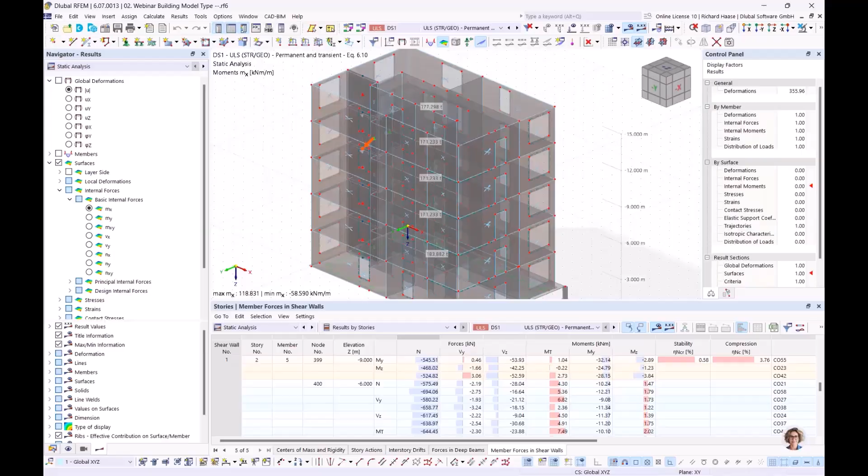Thank you, Richard, for your nice presentation. I've got an additional hint for you.